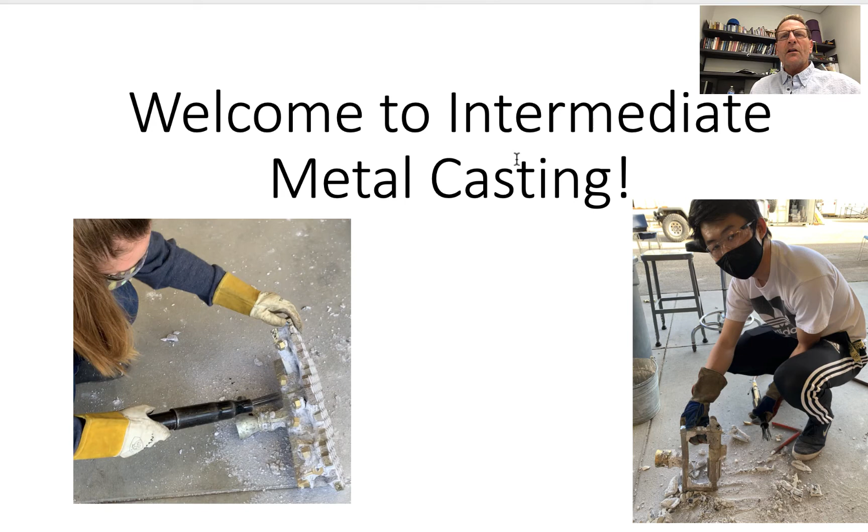I developed this course because metal casting is a very important manufacturing process in our country, and I wanted a better way to share some of the exciting industry opportunities there are for engineers, beyond what are covered in the introductory course here at Cal Poly. So in this video, I'll talk about why I think metal casting is important and discuss some of the technologies and processes that we'll explore in the course.

So let's get started. So why is metal casting important? In the United States, over $100 billion of goods and services are produced in the manufacturing of metal castings each year. And of that, about $32 billion are in the form of salaries and benefits.

Currently, nearly 500,000 people work in jobs that support the foundry industry. These are mostly jobs in non-technical support roles such as crane and forklift operators, process technicians, sales and equipment maintenance. So if you do the math, the average worker in the casting industry earns about $65,000 a year. Based on the Cal Poly engineering graduates who I know who've gone into the foundry industry, the average starting salary for casting engineers is about $80,000 a year.

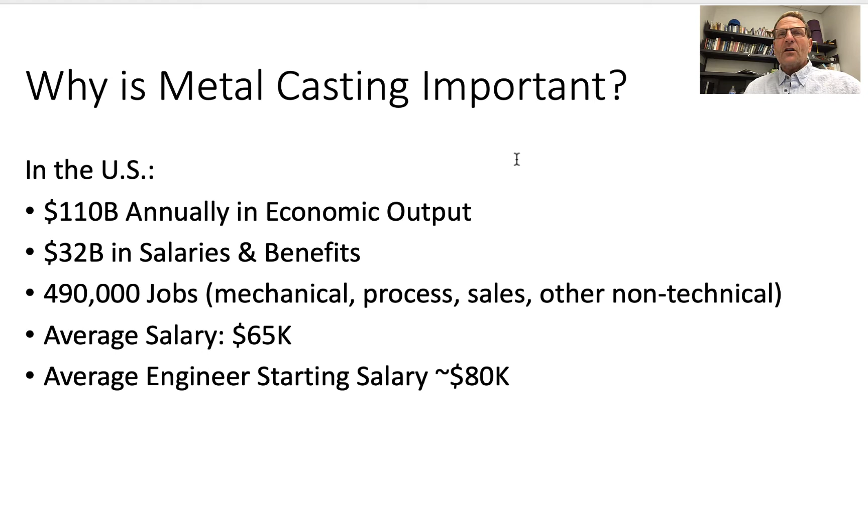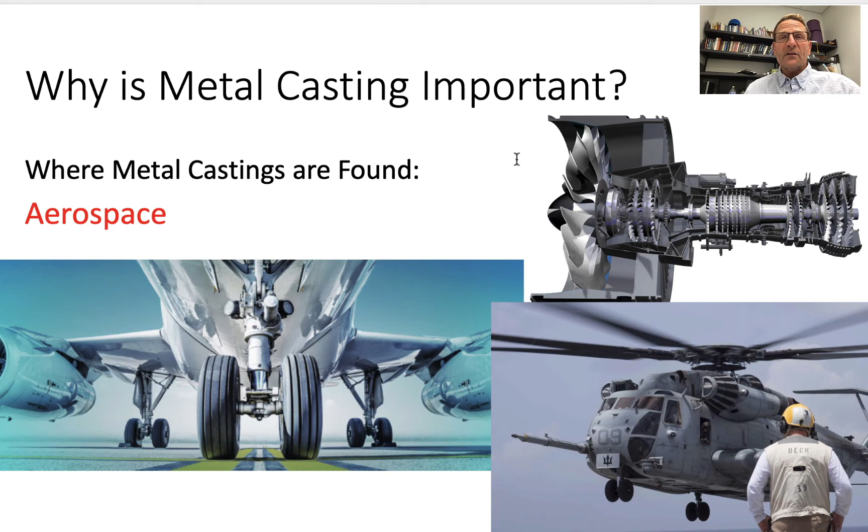So now let's talk about where castings are found. The aerospace industry is a large user of complex, lightweight, high-performance castings for turbine engines, landing systems, and many other applications. Automobiles is another application of metal casting. Wheels, engine blocks, motor housings, and brake systems are just a few examples. A typical car has over 100 metal castings in it.

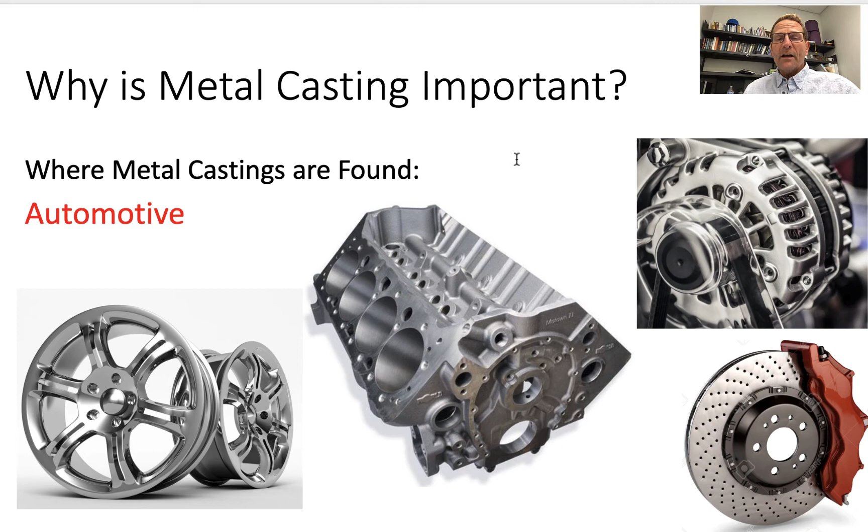How about the food processing industry? Baking, mixing, cooking, and fluid delivery systems all have metal castings throughout. How about sports and recreation equipment? It's another area where metal castings are used. Fishing reels, golf irons, and drivers, fitness and cycling equipment are just examples.

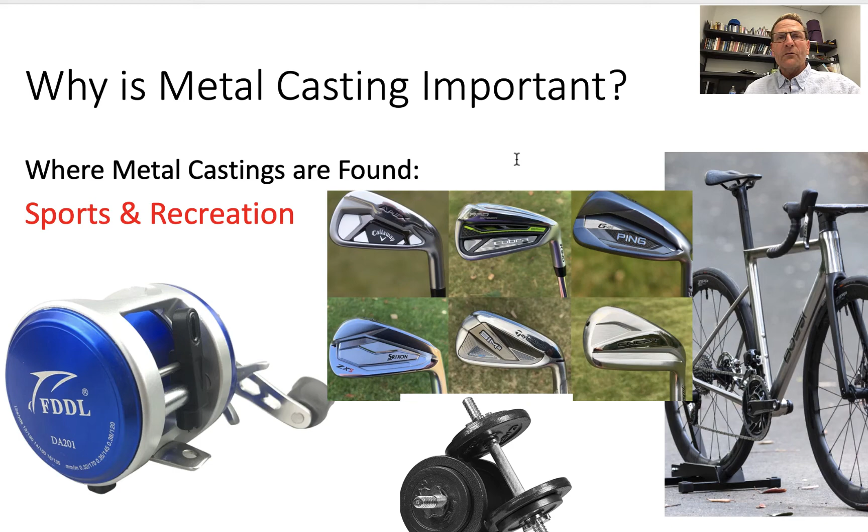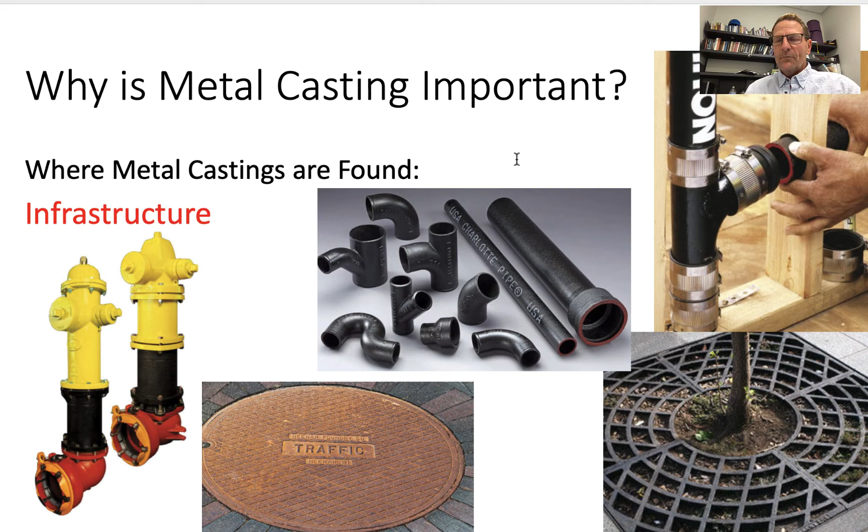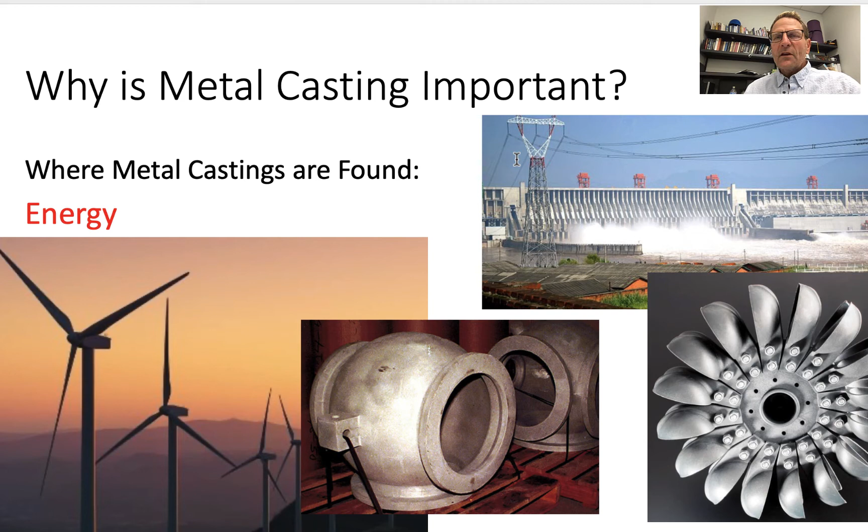The country's infrastructure. This includes buildings, roadways, flood control, and safety systems. All are built with multiple metal castings. They're right in the walls around you. How about the energy sector? This includes the generation of electricity by wind, hydroelectric power. These contain many large castings to keep the lights on everywhere.

Where are metal castings found? Everywhere. It's said you're rarely more than 10 feet from a metal casting.

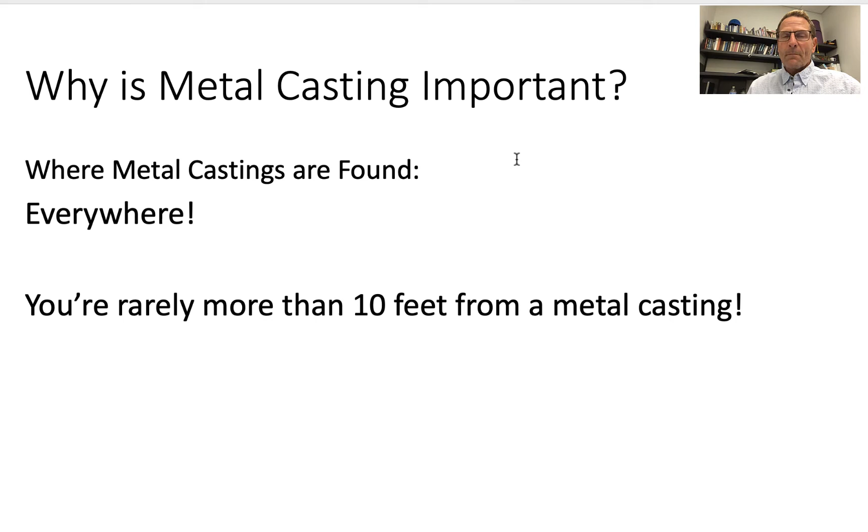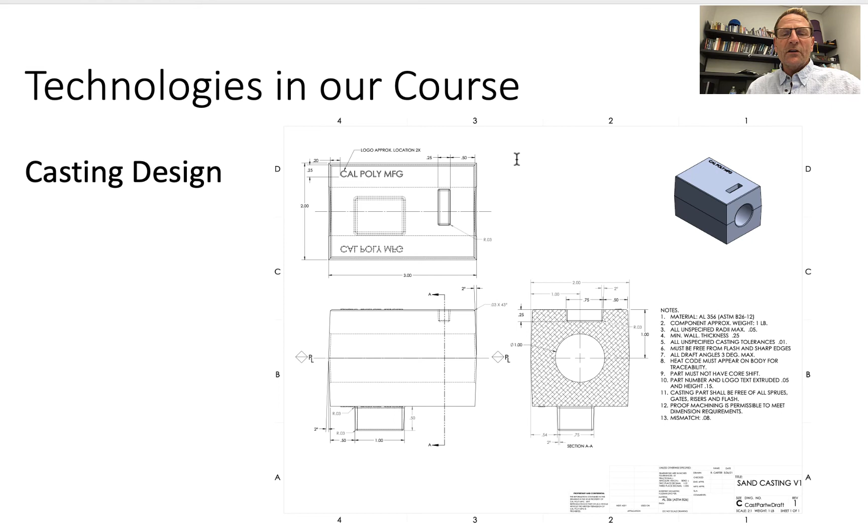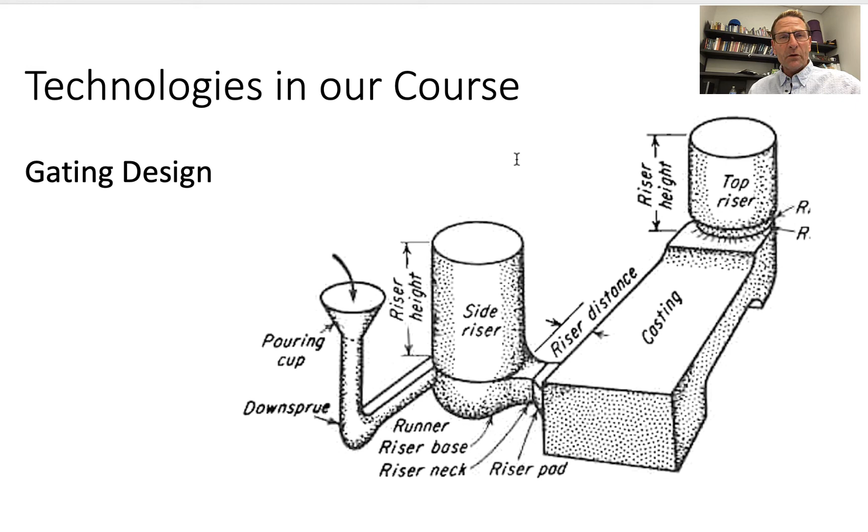So now let's discuss the technologies we'll explore in our course. First, we'll talk about casting design and the engineering drawings we use to communicate part manufacturing details and specifications. So we'll revisit your engineering drawings. We'll need to study gating design, which is critical for feeding liquid metal into the mold cavity in a fashion that fills completely and allows for metal shrinkage during solidification.

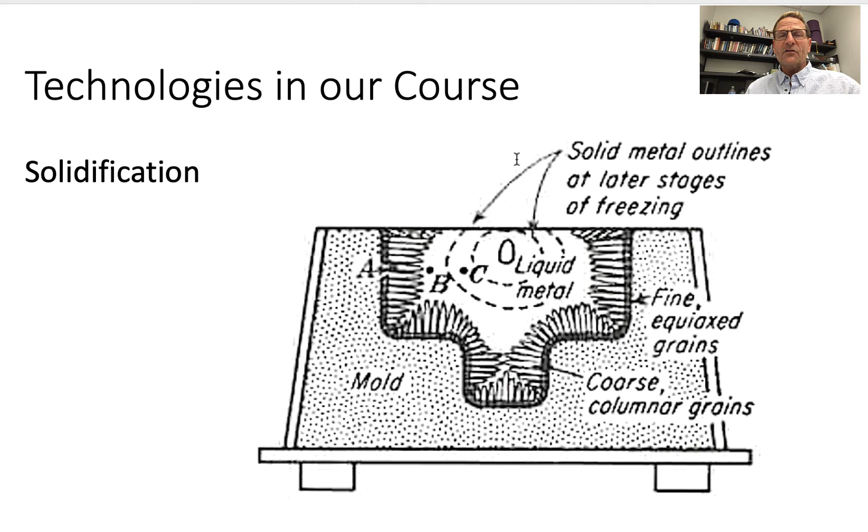The solidification process for metals is another area we'll explore. It's particularly interesting since metal transforms from a liquid to a crystalline solid progressively from the mold walls in at different rates in the casting. So clarity around this process will feed into good gating design strategies. Finally, we'll use flow and solidification simulation software to predict where problem areas may be in our gating design so we can make improvements before actually molding and casting.

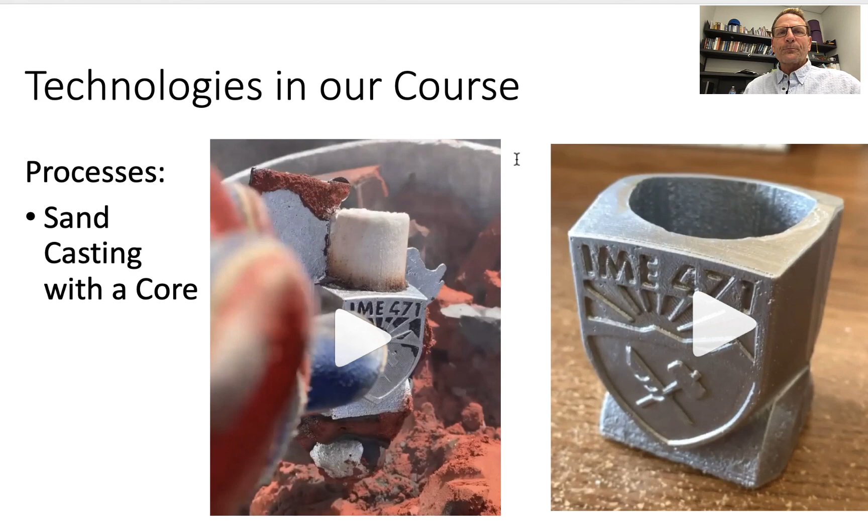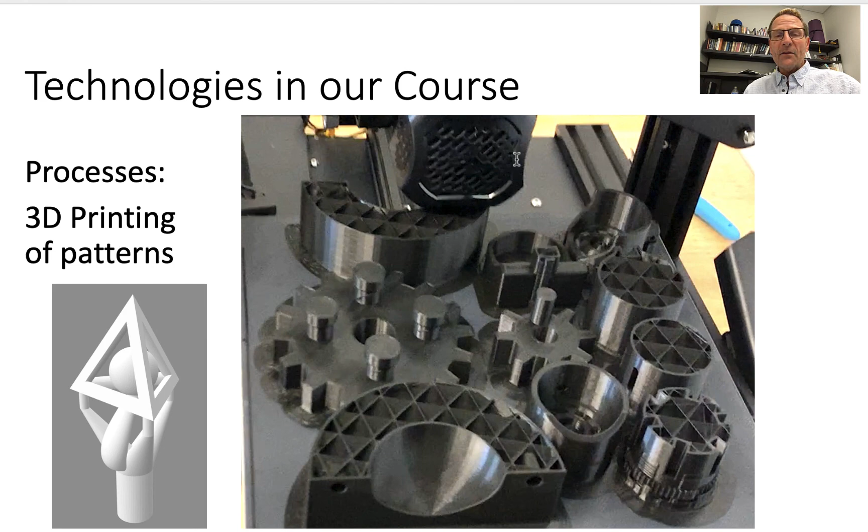One last thing I want to share is some of the types of projects we'll work on in the lab. First, we'll make sand castings using a core to form the interior cavity. We'll use 3D printing to make patterns, form a mold around them, and then cast them in metal. And finally, we will design some smaller parts using 3D printing and make castings from them, and then larger parts using the shell investment process.